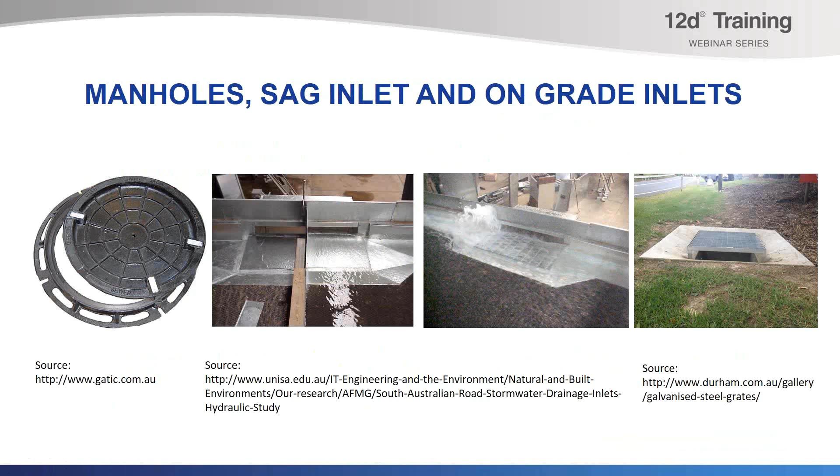Now let's take a quick look as we jump across into 12D, where when we do our modeling, we get to specify what the inlet configuration is. And this involves primarily the drainage network editor, but also the drainage.4D file. So let's jump across into 12D and see how this comes together.

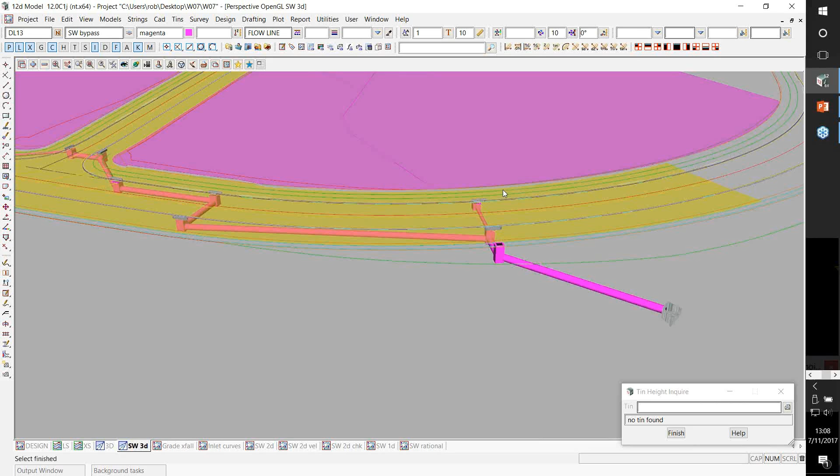So we're going to be looking at a very small network today because it's a training session. And you'll notice that we have a few inlets here. A couple of them are sags, a few of them are on grades, and the water eventually comes out the head wall down here at the end. So where I want to take you first of all was to our drainage network editor. Now, if you're unfamiliar with using the toolbars and you find your way to the 12D track, you'll find that the drainage network editor is the button underneath the track. So the first thing we'll do is we'll come across and we'll go and pick one of our inlets.

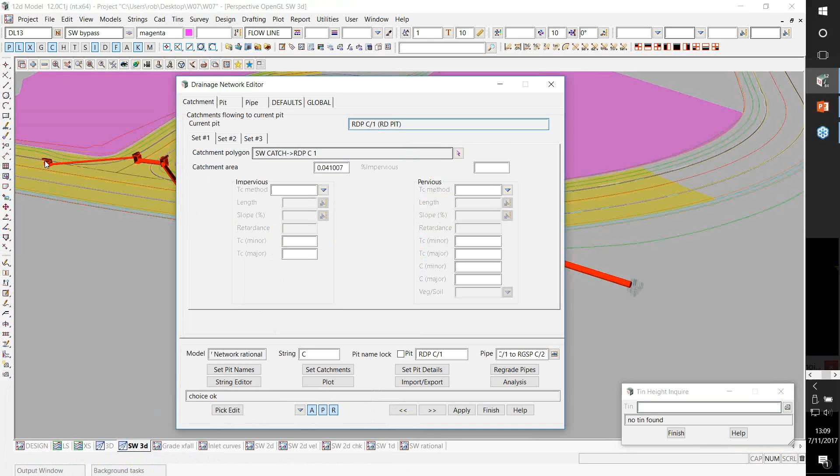Now, one of the first things I might mention is that when we decide whether a pit is an on-grade or a sag pit, sag inlet, it's a very important decision. Sag inlets tend to capture a lot more water than an on-grade, and we must make a decision about whether or not it's truly acting as a sag.

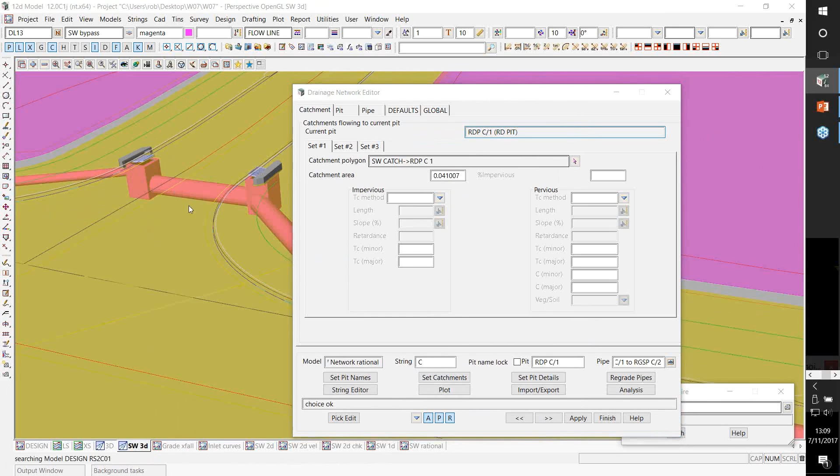So when you make that decision, look at the slope of the roadway that comes into your inlet. Make a decision if you think that the water will truly almost stop, pond at that location, and flow in. And if it meets that criteria, it's pretty safe to say it will act as a sag inlet. If the water is going to continue on by, then reconsider that and start thinking about an on-grade. So let's move back to this first one, which is definitely an on-grade inlet. So we'll go pick that one.

And let's move across to the pit tab. And on the pit tab, down here under inlet configuration, we get to select whether it's an on-grade, sag, or manhole. And in this case, you'll notice we are locked out. Now that's because the drainage network editor works very closely together with the drainage.4D file.

And the way it's set up right now is that if you were to select a sag road pit, it would come back with a bit of warning telling you that the inlet type is going to change. And if I say go ahead and update it, you'll notice that the inlet configuration has switched over to a sag pit. So the pit type has been uniquely associated with a certain inlet configuration. Now it doesn't have to be done that way, but it often is. So if I switch back again, I'm back to my on-grade pit.

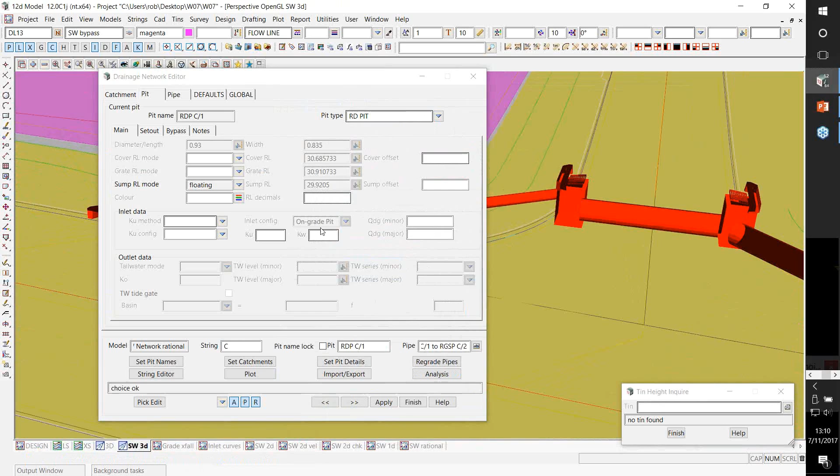So you'll notice how they truly are linked together. Now let's take a moment and see how that linkage works. To do that, we'll move up to our design, come down to our drainage sewer, and move down to our drainage 4D editor. Now this editor is new to version 12, so if you're in one of our older versions, it'd be one of the many good reasons to upgrade.

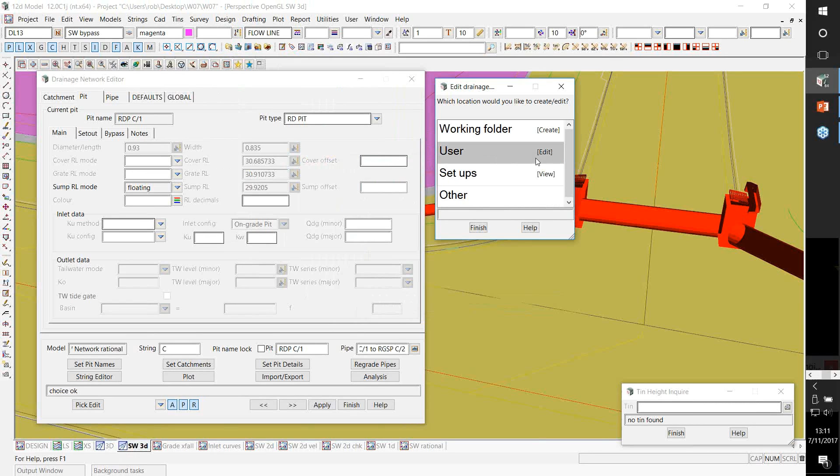If we come across right now, I've taken a copy of my drainage.4d file and it's sitting in my user folder. And it's not write protected, so therefore I can, in edit mode, and selecting it, start editing that file. So let's move down and take a closer look at this road pit.

So if I go select the road pit on the tree, and I scroll down just a little bit on my properties, you'll see that in here, the inlet type has been selected to be only on grade. It's this selection here that forces this inlet configuration to be locked to on grade. If I was to release this, then the user would be free to put in their own inlet configuration type there. I also mentioned before that when I switched over to the SAG inlet, that switched over.

So let's go take a look at that one. There's the SAG road pit that I selected earlier, that type. And if we were to move down, we would find that that one also would be set to be a SAG. And of course, the other option is we could have that locked into being a manhole.

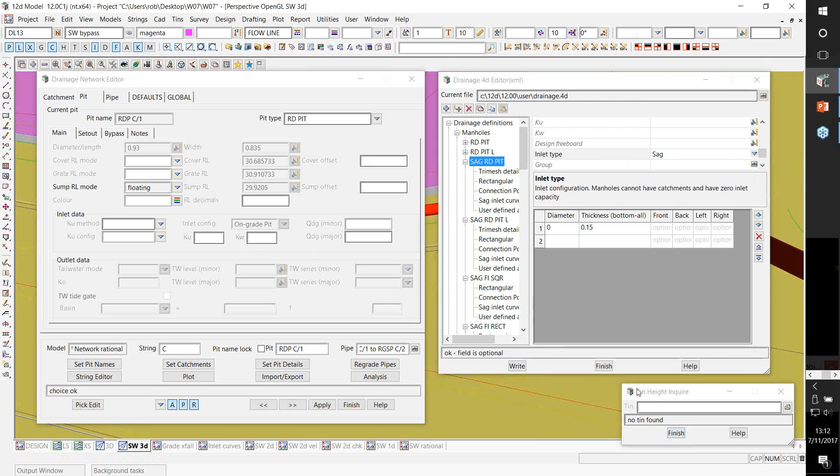So hopefully now I've made it apparent how the drainage.4d file can work together with the drainage network editor to make the whole use and modeling a little more accurate and easier to use, or consistent anyway. So that's the relationship between the drainage network editor and the drainage.4d file.

Now let's start talking about inlet capacity calculations. The heart of the calculations are inlet capacity curves. And there's two primary sources, I would say, for these. There may be more. And the first is an excellent manual. It's put out by the Federal Highway Administration in the United States, and it's referred to as the HEC 22 manual. And inside this manual, you will find many descriptions of inlet capacities.

It's chapter 4.4 that discusses inlet capacity, and you'll find a great number of equations for determining inlet capacities both for side inlets and for grated inlets. Keep in mind they are theoretical calculations, but it is definitely a start. There's many programs and spreadsheets that I've seen over the years that will implement these calculations.

When you do go through the calculations, the general steps that you'll go through is starting off with a road crossfall. And inside 12D, we work with our on-grade inlet capacity curves in groups of constant crossfall. And you'll see these sets a little bit more in a few minutes. The next thing you would do is vary in your calculations, or in the hydraulic model study we'll talk about in a moment, your approach flows and estimate the captured flow depending upon the properties of your inlet and your slope and crossfall of the road.

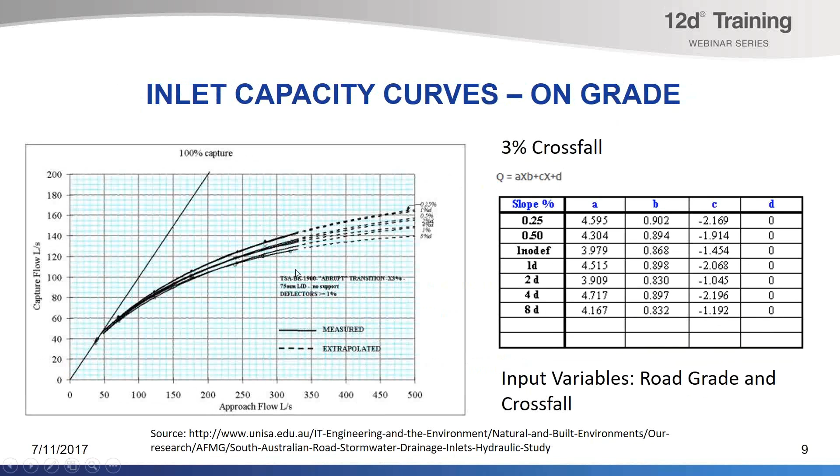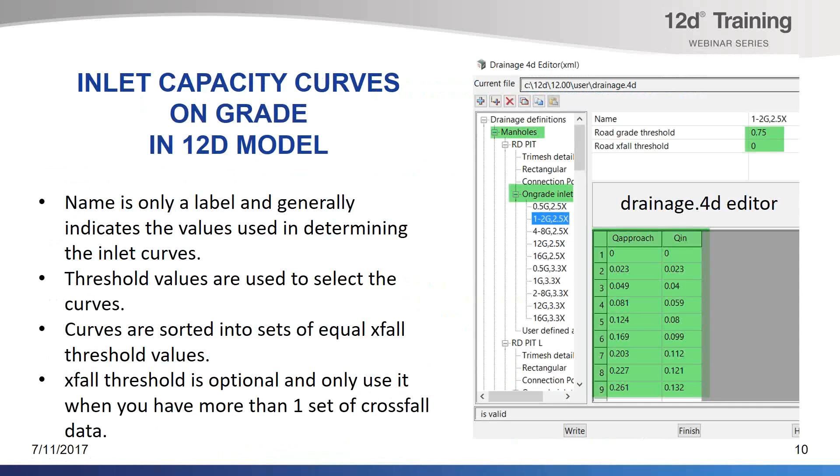When you get these curves, often they're given in curves like this, that you'll digitize. The other way you often will get the data is in the form of a polynomial equation. And inside 12D you can also enter these coefficients instead of digitizing these curves. So now I'd like to take this moment to say, well, how exactly do we get these curves into 12D model? So let's jump back to 12D once again. And I'm going to bring up the drainage.4d file editor one more time.

And let's investigate farther down into what these on-grade inlet curves look like. So you'll notice here for this road pit that we have, we've got a set of 5 curves, all with the same road crossfall, 2.5%. And so that constitutes one set of crossfall measurements. And down below, we've got another set at 3.3% crossfall.

And then within the crossfall sets, we've gone and varied the road grade. So let's just take a moment to take a look at this first road grade. Now down below here, this part will look fairly familiar. This is the digitized points off those curves we were just looking at. Generally, your curves will start at 0, 0, and the next point will be your 100% capture. So it will be the end of the 100% capture. And then you start out with your approach flow, and you'll notice that we're no longer capturing 100% of the flow.

So that's the data. Now let's go back and take a look at the name that we associate with this curve. The name that we assign it is generally an indication of how the tests or calculations were done. So in this case, it was felt that the calculations or the tests done will be valid for a 1% or 1 to 2% road grade and a 2.5% crossfall. There's two other numbers down below here now that probably need a little bit more explanation. Let's start with the crossfall.

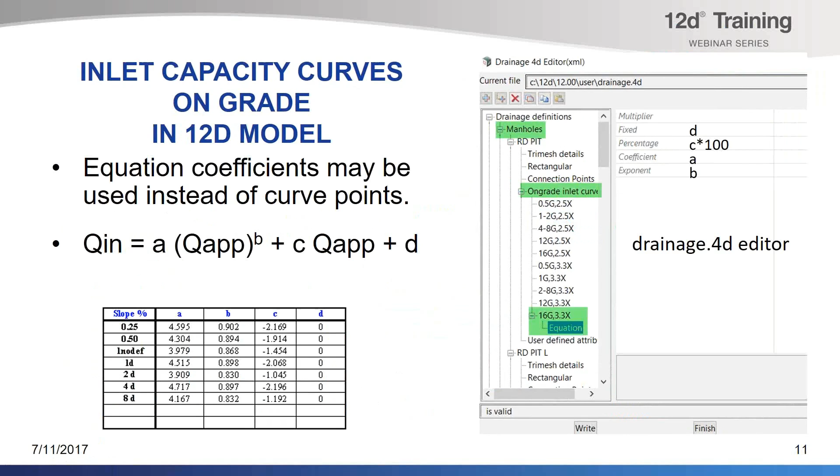I also mentioned that you can add an equation instead of digitizing the points. So now I'd just like to pop back to the drainage.4D editor to show you how that option works. So you don't want to enter both options, but if I did want to add an inlet capacity curve, I'd go to this child selection tool and add the inlet capacity equation. And inside the inlet capacity equation, I could enter in the 4 polynomials as I showed in that earlier screen. The multiplier simply takes the total inlet capacity and multiplies it by that factor. So generally your multiplier will be 1.

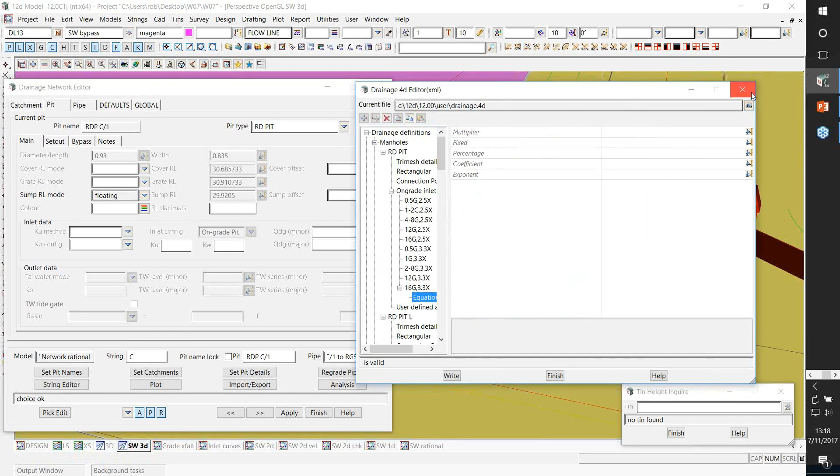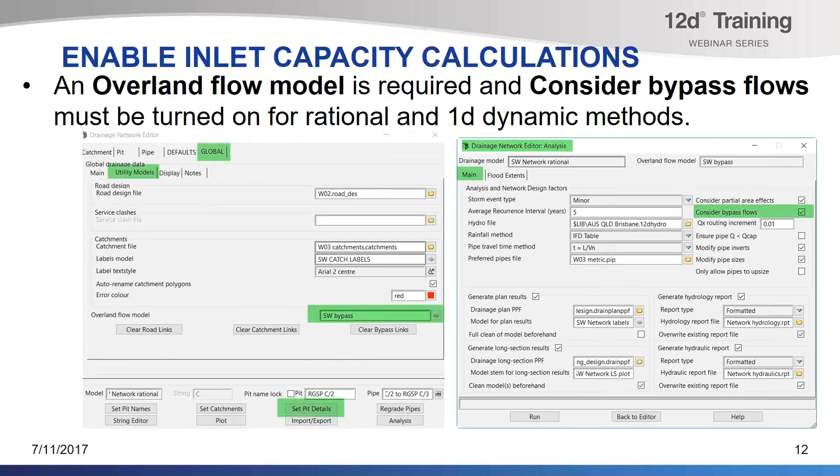So now that we've talked about the background, at least for the on-grade pits, let's take a look at the steps that are required to make inlet capacities enabled inside 12D model. So going back to 12D model, let's head across to our global tab. And on the global tab, we have our utility model tab where we link up the 12D drainage network to the other models inside 12D. And this is the model here that's going to make it all work.

Now this training webinar is not about bypass flow strings, which indeed would take up another webinar and it'd be a very interesting one as well. I look forward to that.

But right now we'll say that we just need those bypass flow string models specified in order to get our bypass running. And what these bypass flow strings do is they're just a string going from one inlet to the next inlet to say this is where the water goes when it will not enter.

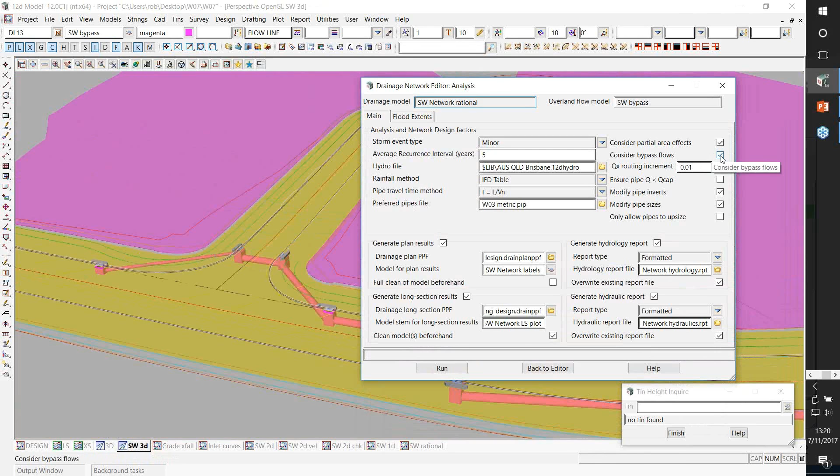So once we've got that model in there, the next thing that happens is when we go to do an analysis, we need to make sure we have the consider bypass flows selected. Now that's crucial when we do our rational method 1D surface flows and when we do our dynamic 1D. That tick box is not required when we do the 2D analysis. So those are the 2 bits to remember: if you want to do bypass flows, make sure that's turned on and make sure that you've got your bypass flow models for the 1D rational and dynamic.

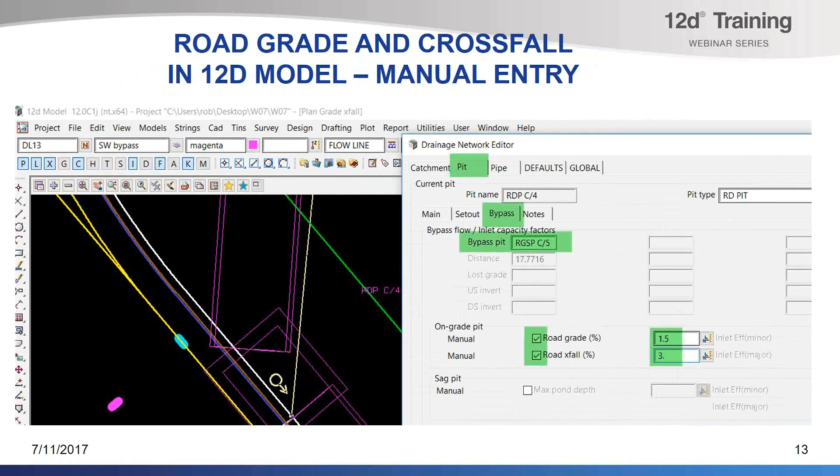Well, after talking about those pieces and ready to go, let's review this. I've talked a great deal about the road grade and road crossfall, but let's see how we get that data into our 12D model. So once again, I've gone and selected that first inlet up here. Let's head back to the pit tab. And if we move back down to our bypass, you'll notice that there is a road grade and road crossfall.

Now, if I was to turn on the manual tick boxes, I'd be welcome to put in my own values if I wished. The concept of the Drainage Network Editor when it was designed was that you can go 100% manual if you wish, type in the values, or the way that most people will use it is an automated procedure where 12D will calculate the values for you. So let's try going the automatic method and start taking a look at this. Now that I've shown you the manual, we're going to switch over to that automatic.

In order to get the 12D model to automatically calculate the road grade and road crossfall from your design tin model, we're going to need to use our road strings. Now these road strings are used for several different aspects of our hydraulics and our physical layout of the model. Essentially, they're not required, but this is one of the options inside 12D that just keeps giving. It's like every time you look at another part of 12D drainage, you find out there's one more thing you can do with our road design strings.

So in this case, what we're going to do is focus on looking at these last three columns and how they impact the measurement of the road grade and road crossfall. So you'll notice that they're completely blank right now, which means we're going to be using the default values. Now there's a few extra rules in the defaults, but essentially we will move up one manhole diameter in the uphill direction in order to measure the road grade. Now of course we want the road grade of the approach flows, and that's why we've gone uphill, according to the design tin model. So officially these set-out strings only need to be an XY string at this moment.

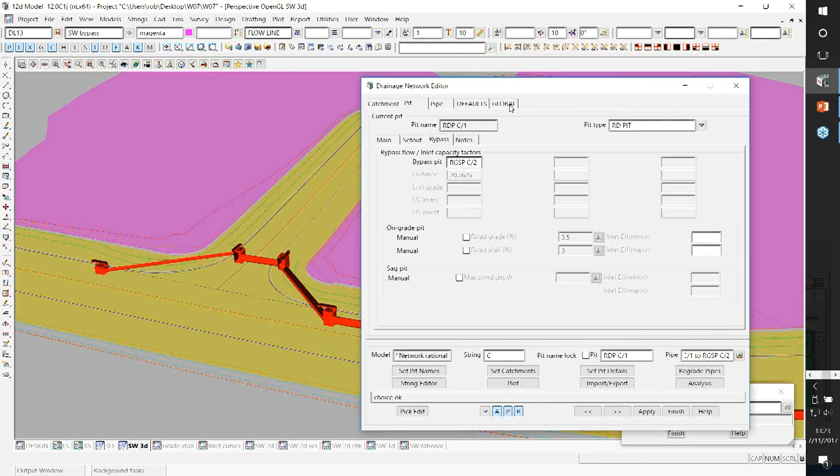So let's go take a look live for a moment at where that would happen. So there's our global tab, there's our utility models. If we go and open up that road design file, you'll see that we have the road grades, the road crossfall, the slope measurements. We've got our set-out strings, which we will use to determine the road grade, and we've got our centerline strings so we know which way to go to measure the road crossfall.

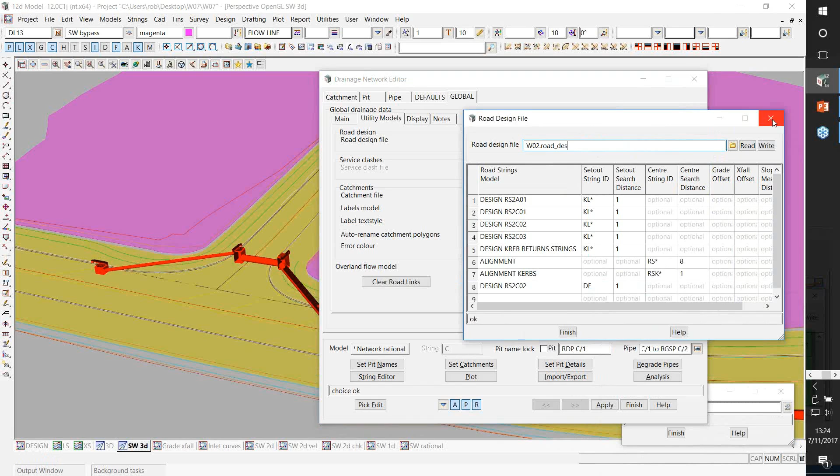Now on a small technicality, you only really need the road crossfall if you have more than one set of crossfalls. If you have a single set, well, there's no need for the extra one because your choice is limited to one set. So that's just a little bit of the background information about how you can automatically calculate the road grade and the road crossfall for an on-grade inlet. Now let's take a look at these inlet capacity curves that you would have entered and a way to display them to yourself and probably someone who's going to review your design.

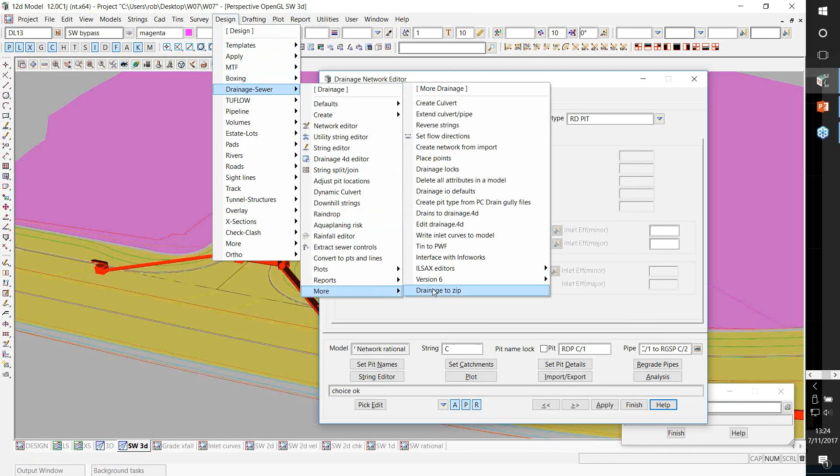Back inside 12D, we have an option under Design Drainage Sewer. We have to go all the way down to More, and it's called Write Inlet Curves to Model. Now when I do this, I tend to put a Z at the beginning just to make sure these models appear at the bottom of my model list.

We multiply the numbers by 1,000. I didn't mention it before, but all of the data that we were entering into the drainage.4D file was in cubic meters per second because we're operating in the metric system. So multiplying them by 1,000 in this case would convert the cubic meters per second into liters per second and convert the meter depths into millimeter depths.

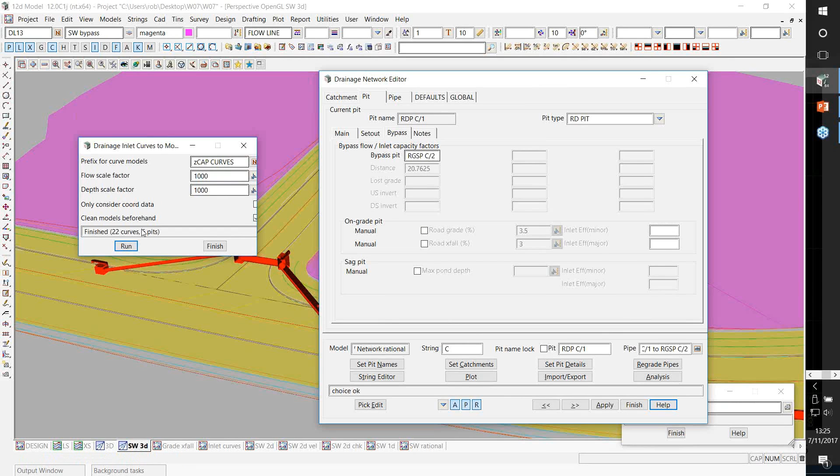So when we go run that, it's a very quick routine to run, it goes and creates a new set of curves. Now often I'll set up a view just ready for my inlet curves, and on this view I've got my... don't need those axes. I've got my axes for my approach flow. Let me move that across. And my captured flow. And I've got my inlet capacity curves for my road pit.

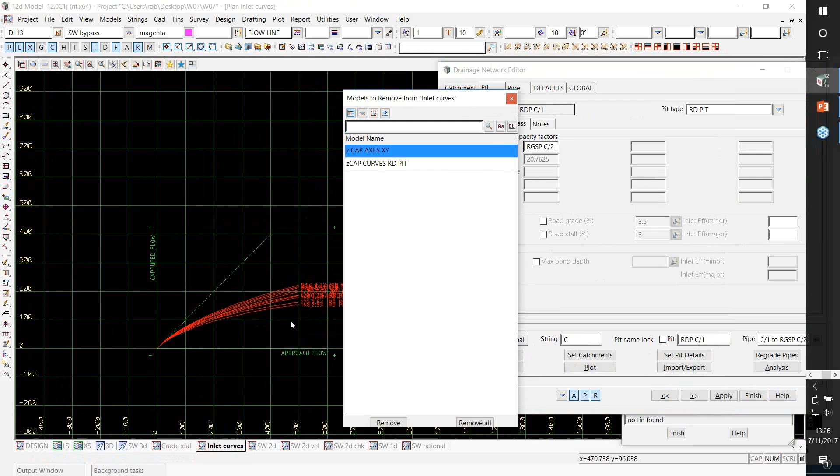Now, a fair question would be, where did those axes labels come from? If you're interested in putting those on your drawing for when you show someone, of course they're not required, but those are available in a 12DA file inside our library, and I'll show you that name shortly.

So what we're looking at here is the data that we looked at in the drainage.4D file. If you remember, that was the end of the 100% capture. So if I was to click on that, you'll notice that that was, let me get a point snap, that was the 1616 from the lowest curve, okay? So that's our end, and then we have, of course, all the extra points from our curves. So, excellent idea to print these curves so you know exactly what you're using inside your design.

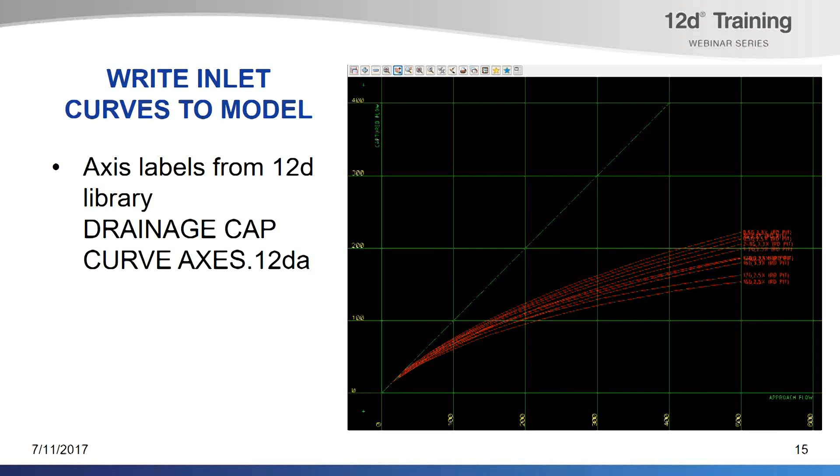Let's leave the on-grade curves behind, and let's move over to talk about the inlet capacity curves for a sag. Now, sag pits, once again, as I mentioned, is where the water generally will stop at a location, of course not come to complete stop, but not bypass, and then start flowing into the inlet. So it will pond up. So it's the depth above the grate that becomes important. So now we'll take a look how we can enter this depth versus Q in.

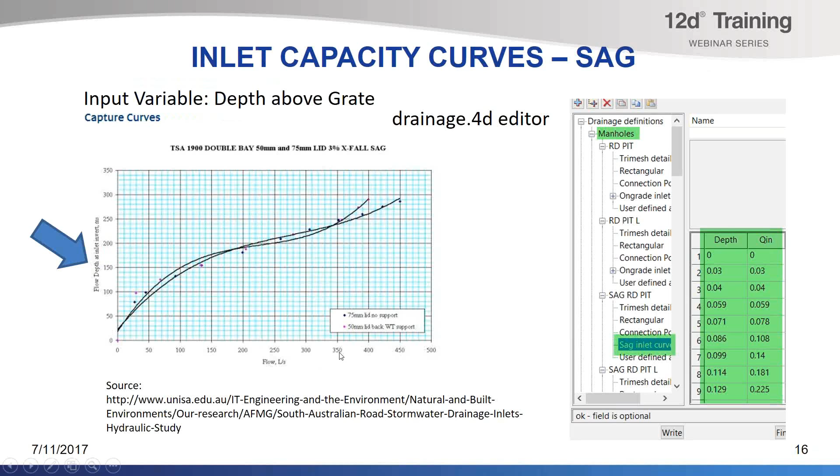Now, if you do get an inlet capacity curve from many sources, there's a tradition inside the stormwater industry to put the flow depth on the vertical axis. And this comes about because the depth, of course, is a vertical measurement, and hence the vertical axis seemed to be a good idea. 12D has gone more with the scientific consistent approach, where we put the flow, inlet flow, on the vertical axis again, exactly the same as the on-grade pits, and we put the depth on the horizontal axis. So let's just go back now, jump into 12D and see where all that happens.

So the very first thing I'll do is I'll go back and I might turn off those curves, and I'm going to add on some sag curves. So what I'm going to do is put on my axis labels, and then I'm going to come down here and add on my cap curve sag for my road pit. And let's add those on.

So once again, this becomes the x-axis. You notice it's depth this time, so it's been a little bit flipped. And one thing I'd like to bring to your attention is that if we looked at about 150 millimeters of depth, this is a typical 2-meter side entry pit, we're capturing almost 300 liters per second. So once again, keep in mind that sag pits tend to capture a lot of water.

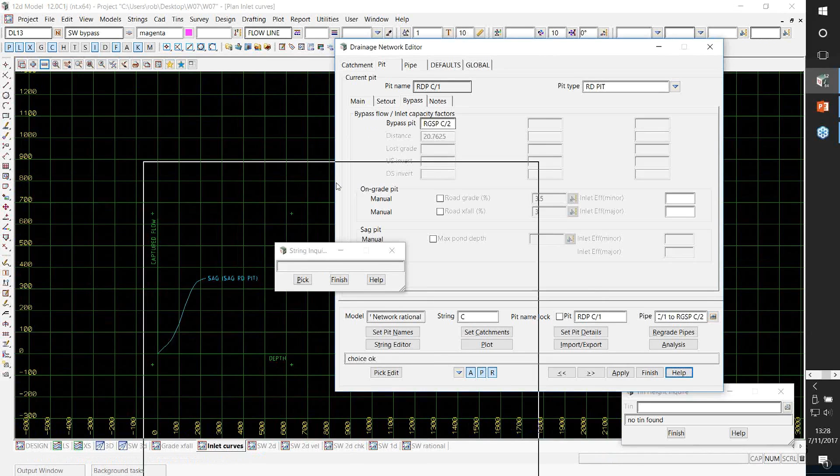Now that's what the curve looked like. I haven't showed you what that curve looked like inside the drainage.4D file, so if I just pop back there one more time, go back to that user, let's just pop down to the sag inlet and go take a look at the sag inlet curve. And once again, there's your depth versus your Q in. The depth in millimeters and your Q in cubic meters per second. One thing you might have noticed with a sag curve is you have only one. On grade curves, of course, you have many. On a sag curve, there's a single curve for that.

Now, in this configuration, these inlets are only used either in an on-grade or a sag, and not both. However, that's not always the case. Many times a user will have a stormwater inlet that can be used equally well in a sag location and in an on-grade location. In that case, we would ask you to put both sets of curves inside one manhole type, and then you would definitely not specify this value here, because you'd want to leave that open to the user to decide at modeling time whether it was going to be in a sag location or an on-grade location.

Now let's go back, and just as we did for the on-grade inlets, I'd like to go back and talk about how we get the depth measurements for the different hydraulic methods inside 12D. So let's start with the rational method.

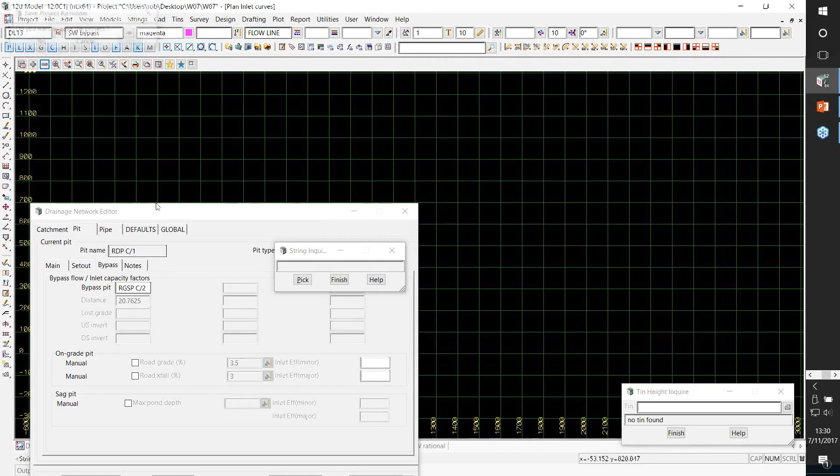So moving across here to a plan view, and let's just get that out of the way. What 12D does is we need to know what the maximum ponding depth is before the water starts to flow out of this catchment and over into the neighboring area. If you've gone and drawn your catchment strings inside 12D, and it's a sag pit, you would expect this catchment line to be drawn around the crest of the catchment. And so all the water flows from this crest line down to the inlet.

Now, if we were going to go and drape that catchment string onto your design tin, and just for those who aren't familiar with that, the design tin is the one specified in Global Main. Okay, so if we drape these onto the design tin, and 12D does that automatically, it will find the low point. Now the low point on the crest is when the water will overtop. So what 12D needs to do is to find out the elevation of that low point, find out the elevation of the grate, and the difference will become the ponding depth.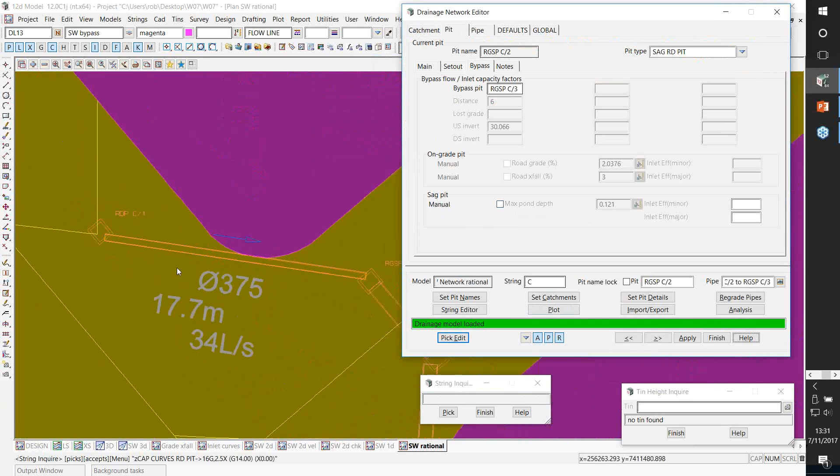Now the place we're going to find that ponding depth, once again, is on the pit bypass. And if I was to go select that sag inlet, you'll see that down here, we still have the other ones, but they're grayed out. But because it's a sag pit, we have our maximum ponding depth. So once again, that was determined by finding the low point on the catchment string and subtracting the grate level.

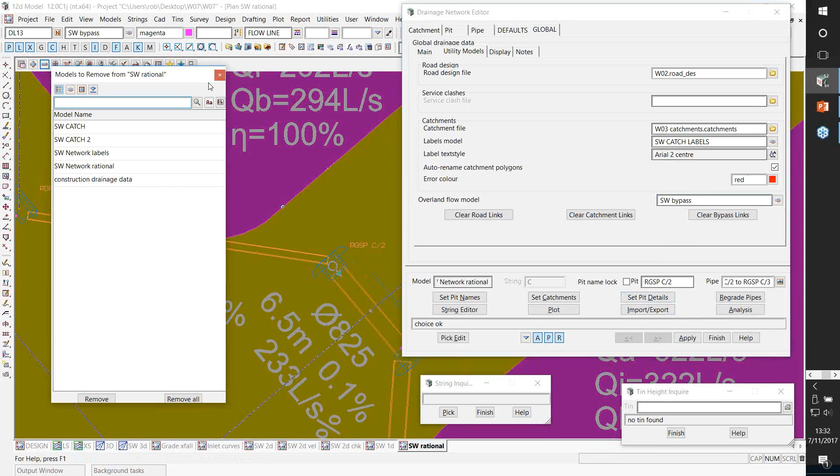Now, the moment we specify our global utility models bypass and do a set pit details, 12D goes and creates a new model for us. And that new model is called construction drainage data. And it's an excellent one for helping us confirm how our inlet capacity calcs are being done. So I don't know if you can quite see it, and you probably can't. It's just a very small cross here. That is where the low point on the curve is, on the catchment strings.

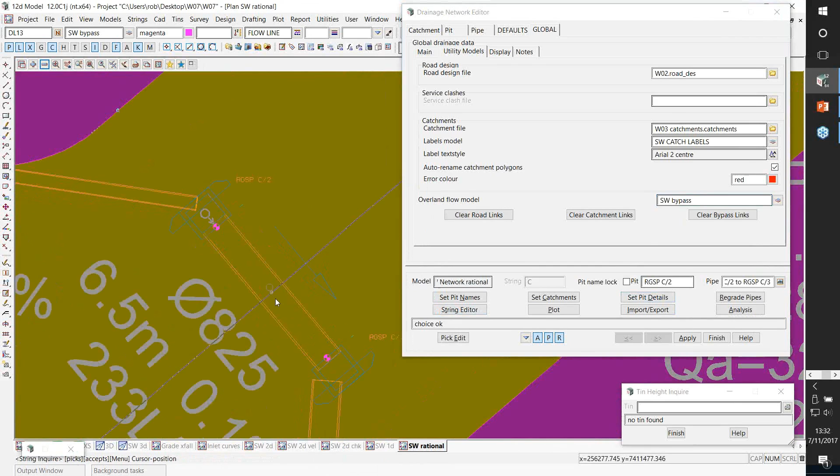So if I was to go select that, there's my catchment, there. That's my network labels. And you can see I'm clicking here, and I'm not quite finding it. Let's just try that one more time. Catchment. All right, so when it's a little bit tough to find them, the best way to get an accurate location of where these inlets are is if we go to our models, we can go down to our string information table and bring up the construction drainage data model.

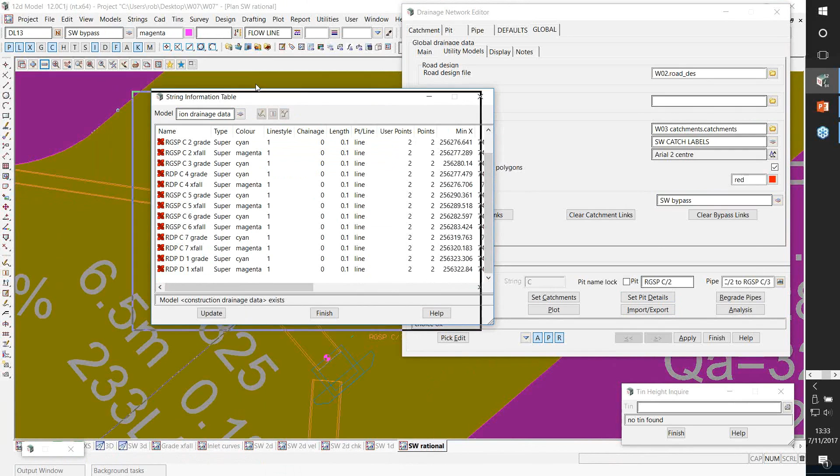Now, if I sort them by the user points, I think I'm onto my trouble right now. I think this might just be a really great time to go do a set pit details for this. And let's go update that. All right, so these are the spill crests that I'm looking for. Now this was inlet C2, so there C2 is there. And when I click on it, you'll notice that there's a great big cross there that helps me accurately find that location.

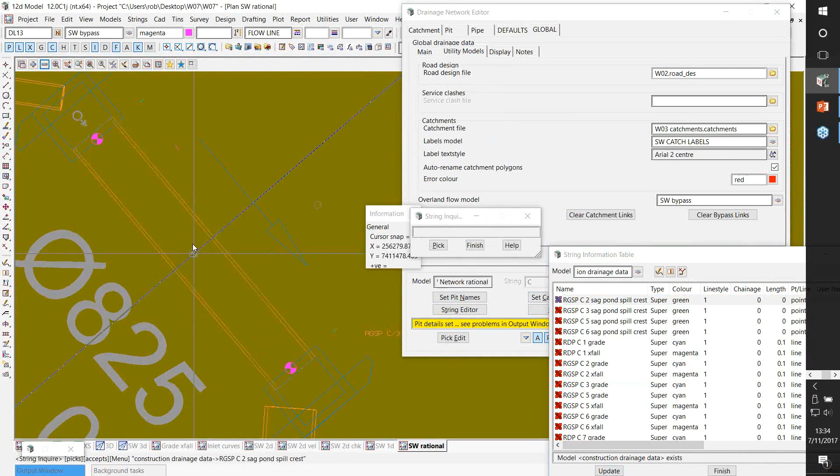Now if I was to come back and ask for some more detail, I could hit my F2 key, which is my string inquire, and go and pick that location. And there's my construction drainage data point, and the Z value on that is 30.066. So that's the low point. That's the elevation when water will just start to overtop. Now the other thing, if I was to come back to my, I've got my minimum, and because there is only one point, the Z value specified there is also going to be the same Z value.

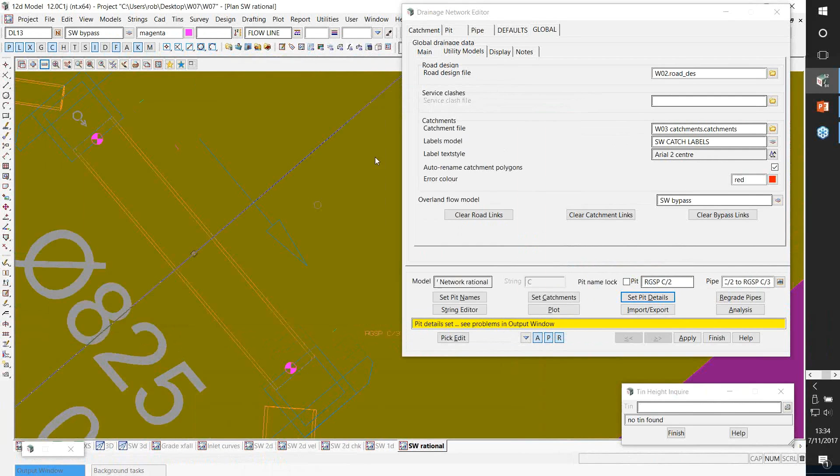Now if we head back to the pit and we take a look at this maximum ponding depth, there may be times when you may want to make that slightly deeper because you have an estimate of how deep the water is going to get when it overflows, or because your terrain model isn't quite finished. It would be a good time that you might want to go manual and override that.

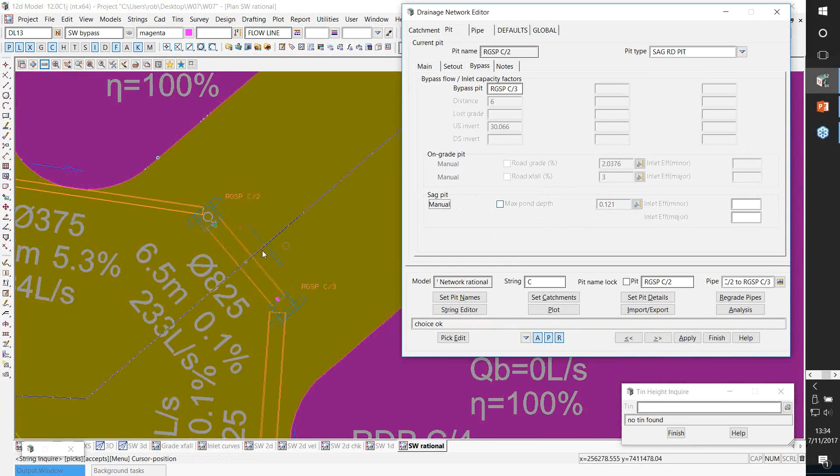One of the symptoms that your catchment strings are not quite in the right direction, or your terrain model isn't quite up to scratch just yet, is that you'll get a negative ponding depth. We'd give you a warning if this ever happened, but the trouble is, of course, that if the overflow point is lower than the grate, then no water is ever going to pond up, and you're never going to capture any water. So watch out for those negative ponding depths. It means there's a bit of a data entry error on your model. So hopefully that talks a great deal about how we measure that maximum ponding depth for the rational method.

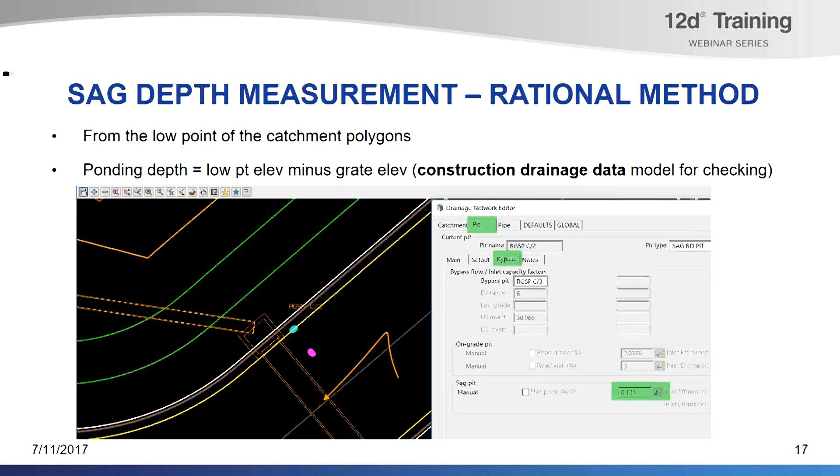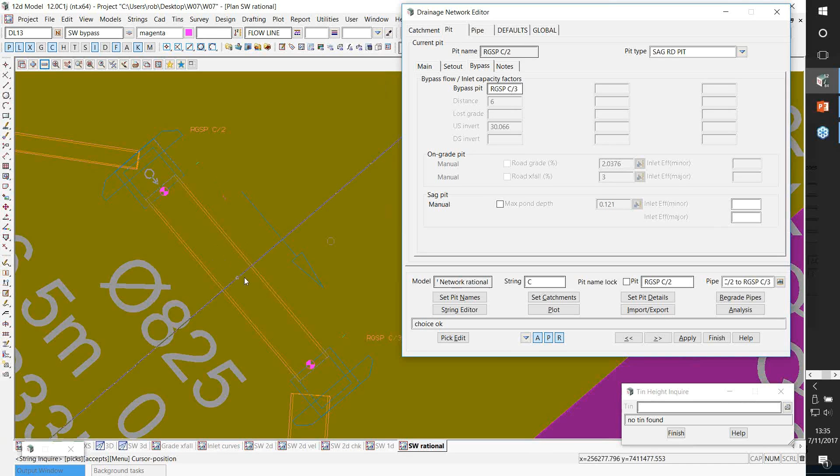Moving on to the 1D dynamic. The reason we had to enter a ponding depth for the rational method is it deals only in peak discharges. It has no concept for volumes or how much water it would take to fill up this area in order to bypass. That's not true with our 1D dynamic. It works with volumes, and it's an important part of the analysis.

So I'm going to switch over to another model here that I have, which is my setup for my 1D dynamic. And let's go select one of those inlets. Same location. And what we do with the dynamic is, because with the dynamic we have dual hydraulic grade lines, we need to have a shape for what the overflow point is going to look like. And our plan here is to model this as an overflow weir.

So when you're working in the dynamic, what I would be doing is going across to my pit tab and going to my bypass shape and selecting a string that I've drawn, just a 2D string, that goes along the crest. And then what that does is 12D automatically drapes that onto your DTM and gets the shape of what it looks like when the water overtops that. Selecting a road weir tells 12D to model the overflow as a weir type calculation rather than a conduit.

Now, whenever 12D drainage works with a shape of a conduit, we're always using shapes, and the absolute elevation, or RL, will come from somewhere else. So when you do this, what we need to specify is what that low overflow point is. And the place that happens is on the bypass tab, and it's the same number you saw before with the rational method, 30.066.

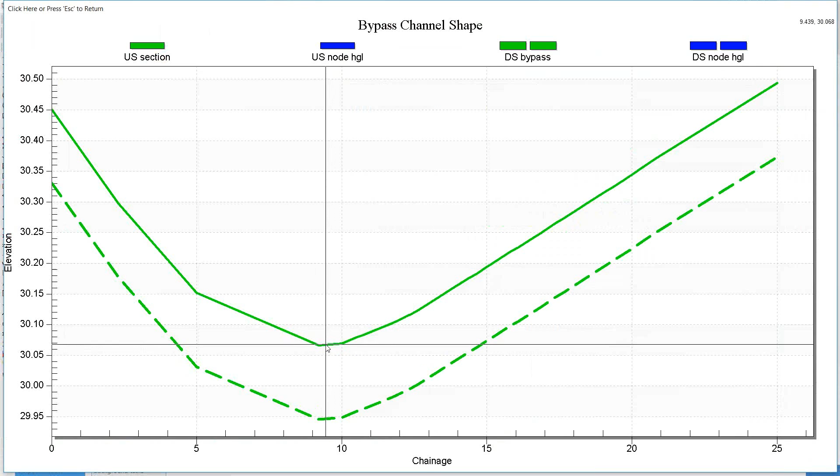So essentially what that does, if I do a right mouse click and maximize this, you'll see that the bottom elevation of our channel shape is sitting at 30.066, and that's when the water would start bypassing. So what's going to determine the bypass is when there's enough volume to fill up this area, and then it flows over. So you'll see it's done slightly different inside the 1D dynamic. And when you do the 1D dynamic, the pit maximum ponding depth is no longer relevant or used.

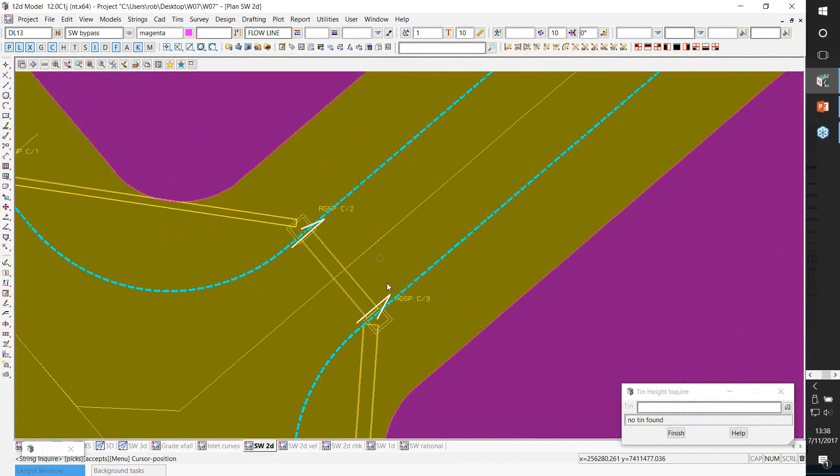Let's now just take a look at what happens in a 2D dynamic model. When it comes to the 2D dynamic model, we have to decide what sort of connection mode there is between the node and the 2D domain. So if I pop back once again, grab my drainage network editor, and pick one of my inlets, head to my pit tab, and you'll notice that the connection is determined. 12D will automatically do this via the grate.

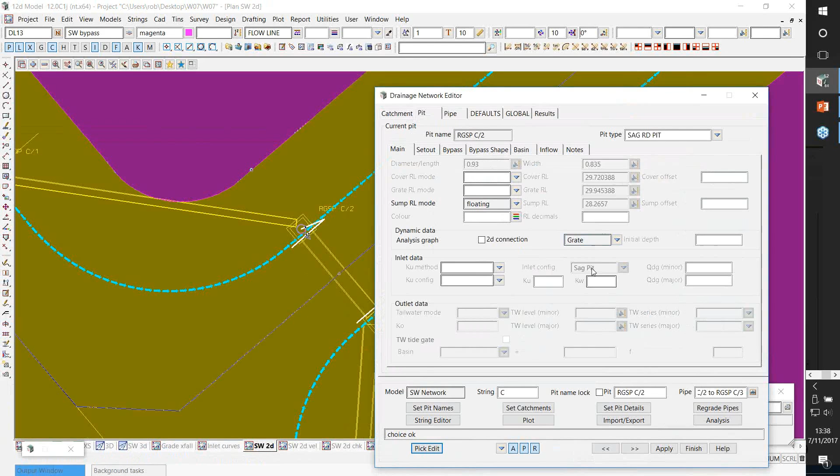So whenever the water is going to enter the stormwater inlet via the grate, we will do inlet capacity calculations. And because it's marked once again as a sag pit, we would do sag pit inlet calculations. One of the things that 12D will do automatically is it will connect all of the outlets to the sump. Because of course the water is not going to bubble up and come out of it. Well, it might for a bubble up pit.

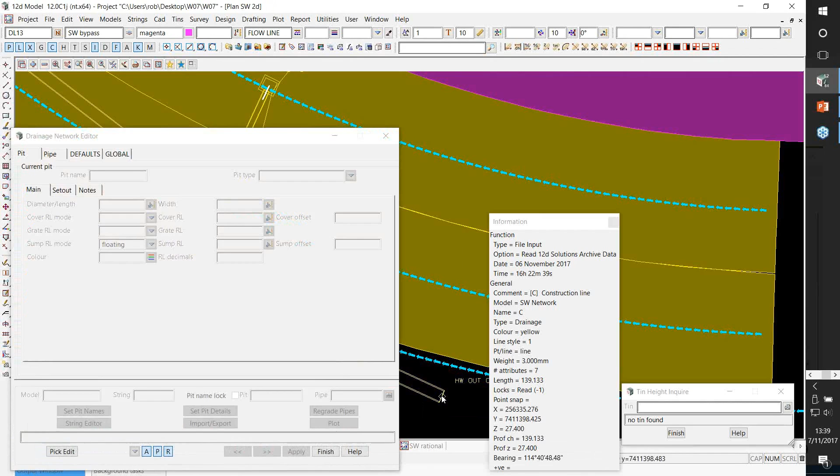But if I was to come down and pick this outlet here, network editor, go back and pick that outlet, and head to the pit tab, you'd see 12D would automatically have connected that to the sump. So the concept there is that the water is going to exit at the bottom of the stormwater inlet. So you can see the water would be coming out down here and entering directly into the 2D domain. So it's important that your 2D connection be set correctly.

Now, the other time you want it connected to the sump is when you're doing a culvert. So if you happen to have any of the culvert inlets set, it will change the Ku method. And if 12D sees the Ku method being any one of our culverts, then it will also switch this over to be a sump for you.

So to summarize that once again, if you have an outlet or a culvert, 12D will automatically hook it up to the sump. Everything else winds up being a grate, unless of course it's a manhole. And with a manhole, there is no connection. On the selection menu, you'll notice there are two different options, a not set versus a none.

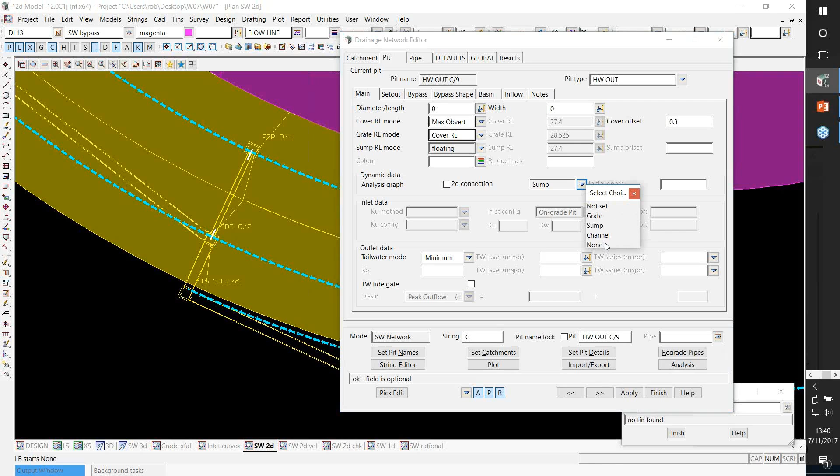Well, the difference here is that if we go to the not set, it means on the next run, 12D is more than welcome to go and change it to whatever it feels is appropriate. So not set instructs 12D to go and select one of these. If you set it to none, that's a way to tell 12D that you absolutely under no circumstances want that inlet connected to the 2D domain.

So you'll see that's the extra step when it comes to looking at inlet capacities and the connection between the 1D pipe system and the 2D above ground analysis. Now there's going to be one other step that comes into the connection, and that is to make sure that the cells are big enough to deliver the water to the inlets.

Now when I talked about a sag pit, we talked about the fact that they do capture a great deal of water. And in the analysis that we're about to run, we're using 1 meter grid cells. Now a 1 meter cell may not have enough water, probably won't, to supply a sag pit. And also the lintel is often 2 meters or longer. So we need to instruct 12D to connect more than one grid cell to the sag inlet. And we do this via 2D connection zone lines.

So the idea inside 12D is you draw a string cutting across the cells that you'd like to connect, and then finish off at the center of the inlet. The cells that this line crosses determine the connection. This last little bit, the last segment, is completely ignored in the selection of the cells.

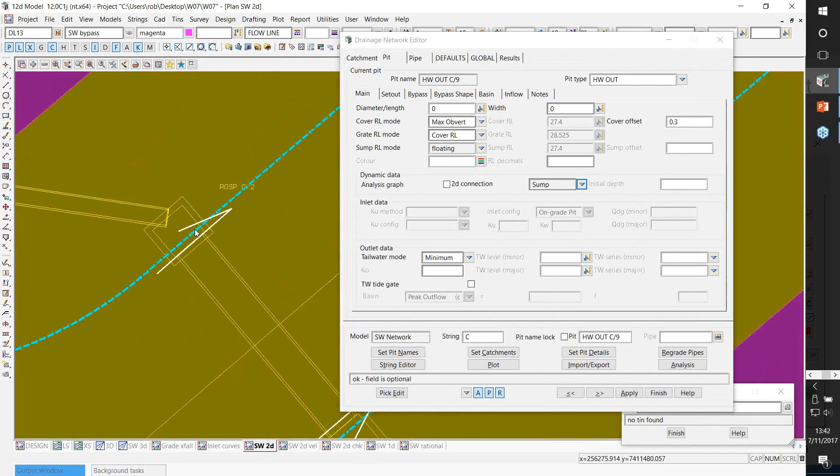So if we were to jump back into 12D for a moment just to see what one of those would look like live, okay, there's the line that's drawn there. Let me just go pick that one so we'll stay a little bit in that area. There we go. So if I go to my global tab and utility models, that's where I've specified the model containing those connection zones. And it's the set pit details button that tells it to do the connections.

So in short, when you're doing the 2D modeling and you feel that your inlets need to be connected to more than one cell, this is exactly what you need. You need a connection zones model and those connection zone strings.

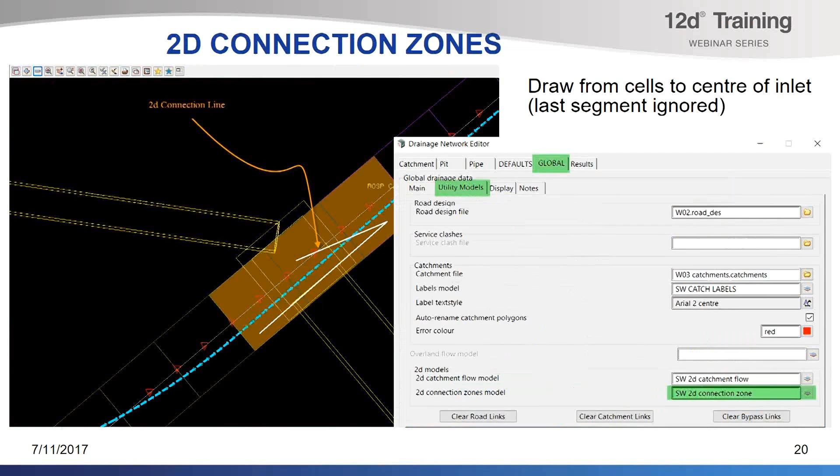Now, just before I take you back to the PowerPoint, the actual inlet calculations, the depth of water on the surface, is something that TUFLOW has a good handle on. It reports back to 12D exactly what the depth is, and then 12D extracts that amount of water from the 2D domain and passes it into the pipe system. And of course, that exchange could go in either direction if we had excess flow coming up to the surface. So that's about the 2D connections and the connection zones.

One question that frequently comes up is, well, what about trench grates? What about these long grates whose inlet capacity is dependent upon their length? The inlet capacity for these is specified in cubic meters per second per meter of grate. So what I might recommend is to enter that inlet capacity as a fixed value into our drainage.4d file. And then you can use your inlet efficiency to specify the length of the grate.

So for example, if you were to put in a 2 meter long grate, it would take this number and multiply it by 2, and then it would change the inlet capacity. A good way to look at trench grates. Currently there is a maximum of 10 allowed for inlet efficiencies. So currently, without doing some other fudging, you'd have to keep your grate lengths under 10 meters.

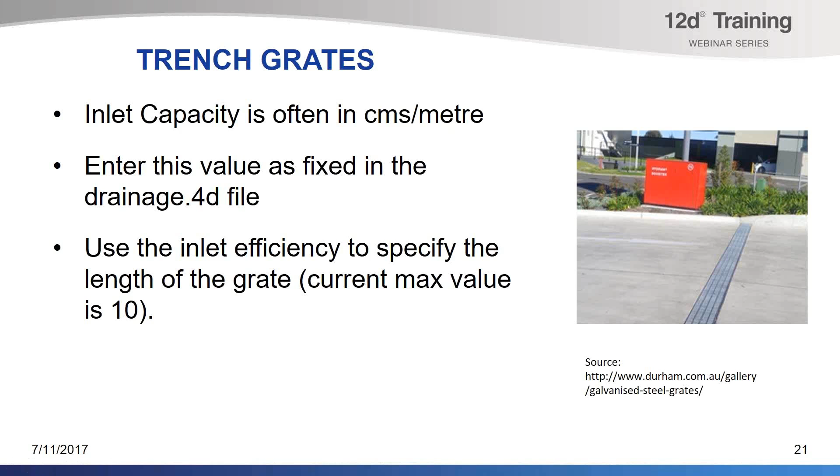So we've talked a great deal about the setting up of the inlet capacities. And in case you're wondering, yes, we are going to do live runs at the end here. But before I move there, I want to talk a little bit about inlet efficiency and blockage. Now, if we remember those original pictures where the water was freely flowing into the grates in that hydraulics lab, just how a stormwater inlet blocks is wide open.

There are so many different ways that an inlet could block, at the upstream, the downstream, it could be the side. So what happens when we start looking at blockage? The question really is how will the stormwater network perform under reduced inlet capacities? Now that's a very open-ended statement, reduced inlet capacities.

And there's two primary ways I've seen people model or want to model the reduced inlet capacity. What I have labeled here is option A, and this is one that's often talked about in the early versions of AR&R, where you will go and multiply the captured flow by an inlet efficiency, for example, 0.8. So what happens in this case is that all of this axis gets multiplied by 0.8 and it essentially flattens out the curve.

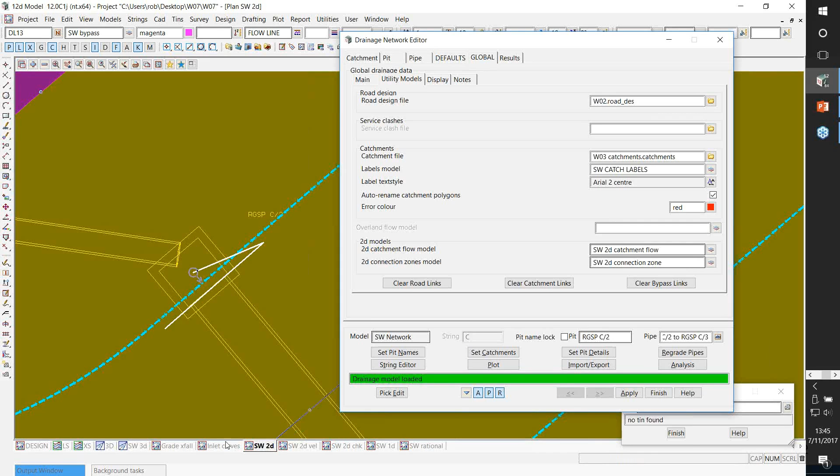Now, if I was to jump back into 12D just for a moment and take a look at those inlet curves, I might just jump back to my on-grade ones. Okay. What that's going to do is move down this axis. So before, when I was capturing 16 liters per second, if I had an inlet efficiency of 0.8, it would bring that down to 80% of that. But the trouble is it's not just this point. If I had 1 liter per second approaching, I would only capture 0.8 of a liter per second. And that really doesn't work very well if you're trying to model 100% inlet capacity.

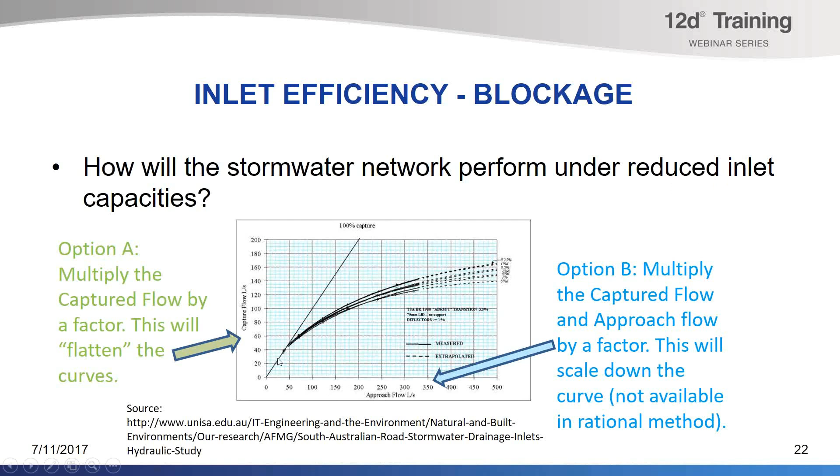So another good idea came out for modeling reduced inlet capacities, because keep in mind that's what we're trying to do, and that was to multiply both axes by a factor. Now this has a much more interesting effect. What happens is the 100% inlet capacity point moves directly down the line. So we go back into 12D, okay, that's 16, would move straight down here until we get to the 80% mark. So the 100% inlet capacity would end at a lower value, but we would still get 100% inlet capacity.

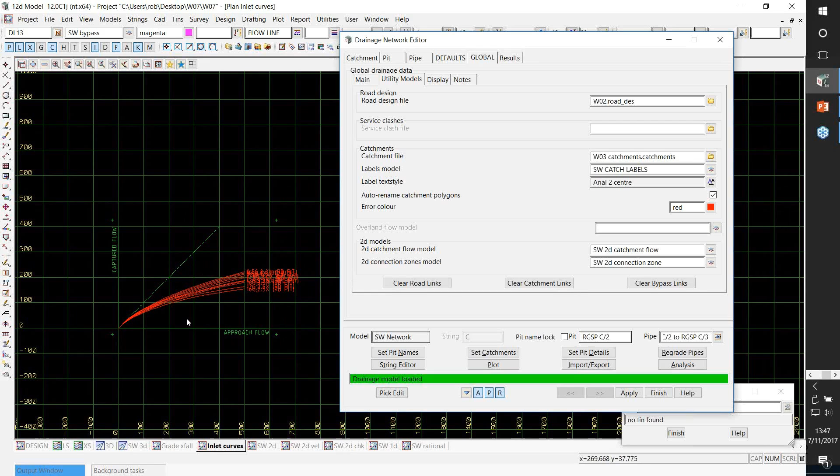So the effect of this is to take these entire inlet capacity curves and scale them down. So we've adopted the name scaled inlet capacities. If I went to my global tab and to main, 12D has an option of scaled blockages, and you can use that for the 1D or the 2D analysis. It's currently not available for the rational method. So that's the concept: it scales down the entire curves by multiplying both axes by that inlet efficiency. And that's just a screen of how we do that.

Now, the next part of inlet efficiency is how we put these values in when we're ready to look at a major storm. Inside 12D, we work with the concept of defaults, where you can set implicitly what the inlet capacities are. So defaults, pits, and if we take a look at the major storm, we've set the inlet efficiencies to 0.8 for our on-grade pits, and 0.5 for our sag pits. Now, anything that you ever find on the defaults tab, you're always welcome to override and explicitly set.

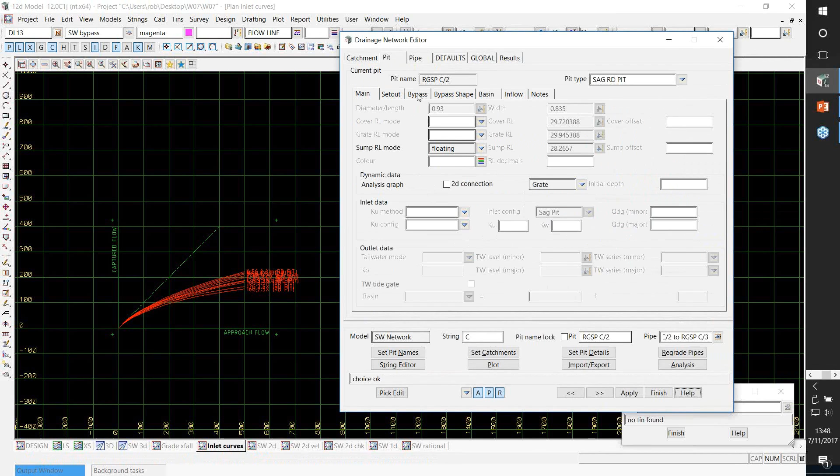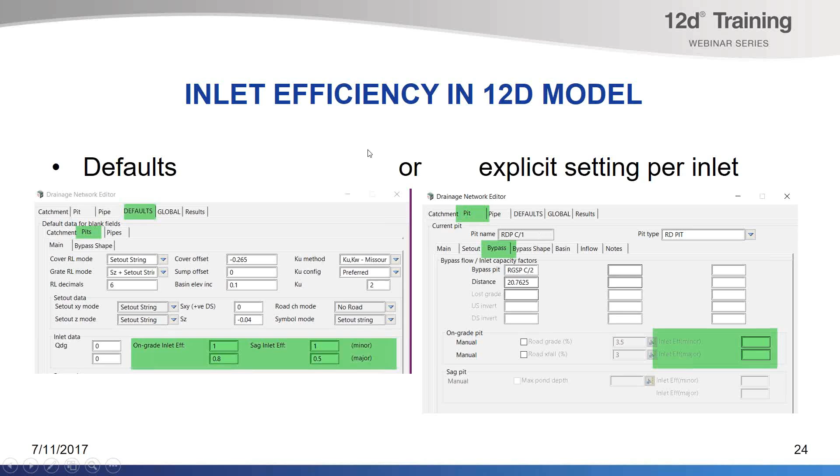So if I went back to my pit tab and then to the bypass, I'd be able to specify my inlet efficiencies there. And of course, blank means use the default, and if you happen to have forgotten what the default is, it'll be presented to you as the tooltip. So that's what we're going to look at doing for the inlet efficiencies.

So, a great deal of information has been presented here, and we've talked about the on-grade pits, sag pits and manholes, and we've talked about them in all three modeling approaches: the unsteady, the 2D model, and the rational method. So now what I'd like to do is run these and take a look at the results. So I'm going to jump back into 12D, and let's start with the 2D modeling.

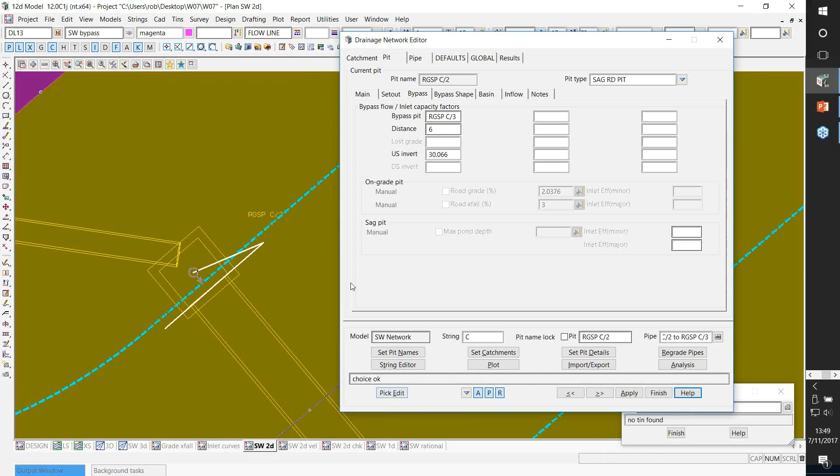With our 2D modeling, the first place most people are going to get access to this is by using the road flow. So I come across here and grab our road flow. You'll notice that this has been pre-filled out, and that's because I have set the defaults, to save myself a little bit of typing during the presentation. Now, it's not a road flow webinar. As a matter of fact, we have a very good road flow webinar on our YouTube site.

But the part I want to draw your attention to here is that on the optional tab, we've specified our drainage network. And it is that drainage network that's going to be supplying the flows to that model, which is why we have our rainfall on grid set to 0. So when we hit that run button and say yes, it's going to erase the files, start from scratch, and analyze every one of those inlets within the 2D domain and mark them as a grade inlet connection, a sump inlet connection or none, as we discussed earlier.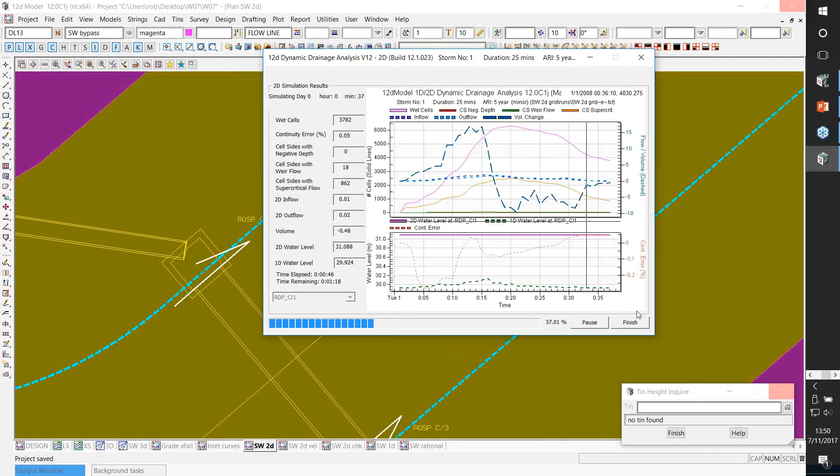I think we've pretty well got it. You can see that the wet cells are dropping off, so the system is definitely in the recession limb. We can just finish that. And now that that's finished, we'd like to go read those results in. And when we read results, we always need to pick the log file, and we can go read those results.

Now, if we jump across, I've got a view already set up with our tins on it. And of course, one of the beauties of 2D modeling is you can see here we've got our approach flow to this pit. As soon as the water starts to go around the corner, you'll notice that it doesn't follow directly around the corner. We get to see the effect of the velocity and momentum of the flow.

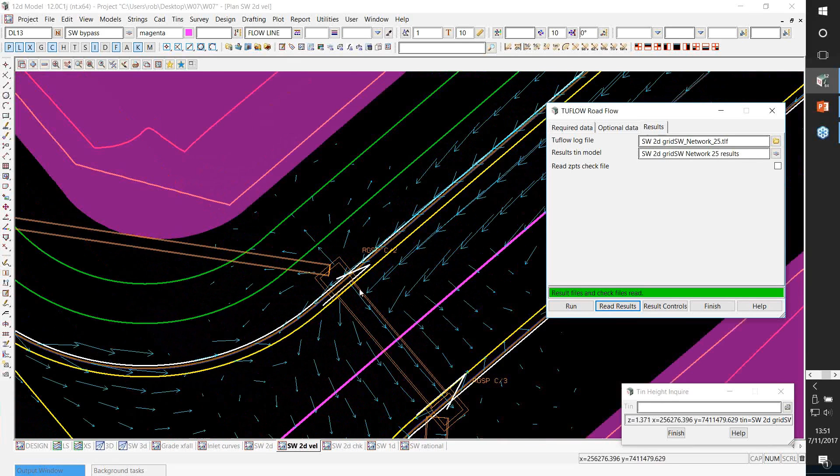And of course, we've got a very large catchment coming down this direction, which is why we get that extra momentum carrying the flow over in this direction, and then off it goes and it continues down the roadway. So the 2D gives us a very good idea of exactly where the water is going to go. But now let's jump back and see how we can look at those results.

Once again, we'll jump to the Drainage Network Editor, and I'll start out by taking a look at this on-grade pit we were looking at earlier. So if we head across to our Results tab, one of the graphs that's available with our 2D, or our 1D as well, is our approach flow, elevation, and captured flow. So I'll hit the Enter key on that, and I'll maximize this so that everyone can see it quite clearly.

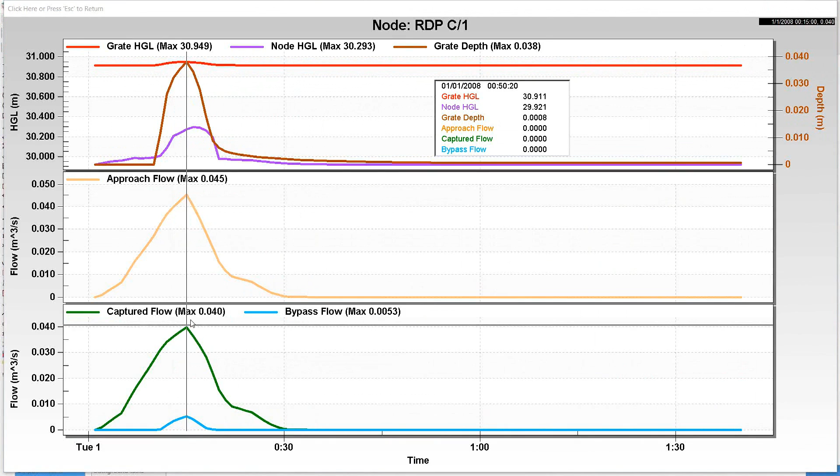Now this gives you a good snapshot of what's happening. We've got 45 liters per second approaching from our catchment flow. We're capturing 40 liters per second, and almost 5 to 6 liters per second is bypassing on the downstream side. At the same time, we can take a look at this vertical axis, and this brown axis refers to the brown line. So it looks like we've got about 40 mils of depth as the water approaches. Now keep in mind, for an on-grade pit, it's the approach flow that determines how much goes in. I was just mentioning the depth part.

So if we were now to jump down and take a look at that sag pit and go back and ask for that same graph, we would get a completely different graph. And because this is a sag pit, we've got 600 liters per second approaching here. What's determining how much gets captured is the depth. And you can see the depth has gone up to 300 millimeters.

Now, if you remember back to the other models, especially the rational, when we talked about 121 as the maximum ponding depth, well, this means that the overflow that's overflowing the road is up to a good 100 millimeters deep, or even, of course, 180 if you do the math. So it's the depth here, once again, that's determining.

Now, the inlet flows. The other thing that's odd is you'll notice the captured flow all of a sudden takes a dive right about the peak of the storm. Bit of bad timing, if you ask me. But if that happened, I'd certainly want to investigate why. So let's go back and let's ask for our grade and invert elevations.

And what you're going to see here is that the subsurface HGL went and reached the grade level. And as soon as that subsurface reaches the grade, of course, that's going to inhibit how much water can be captured and come back down into the subsystem. Not only that, as soon as the two HGLs meet together, the surface HGL provides a much greater head to push water through the pipe.

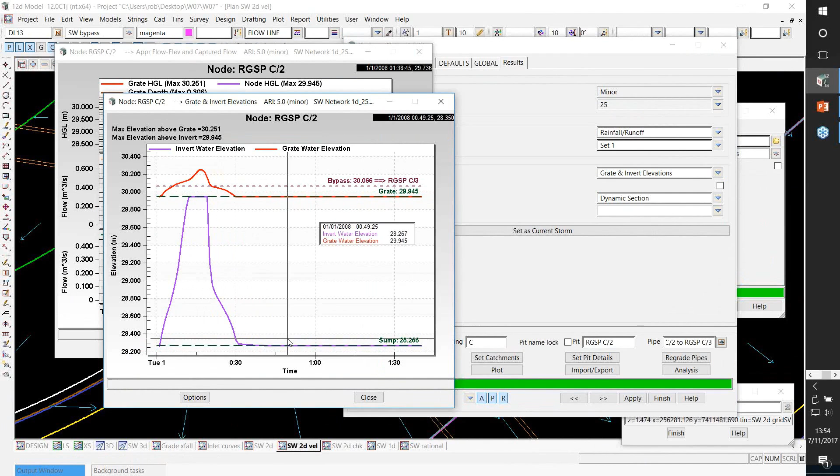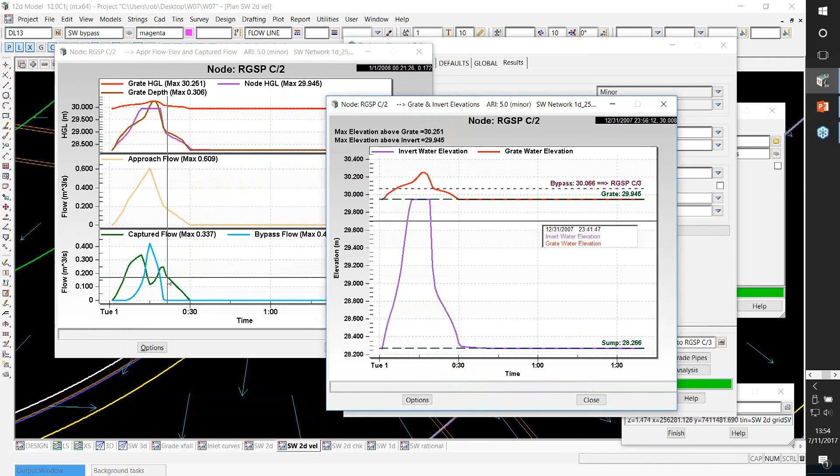So that's going to accelerate the outflow from a pipe, and then vice versa, it's going to decrease the flow in the upstream pipe. So that joining of the subsurface and the surface HGL is a very, very important part of the analysis that 12d does. And of course, you can see the impact of that on the inlet capture.

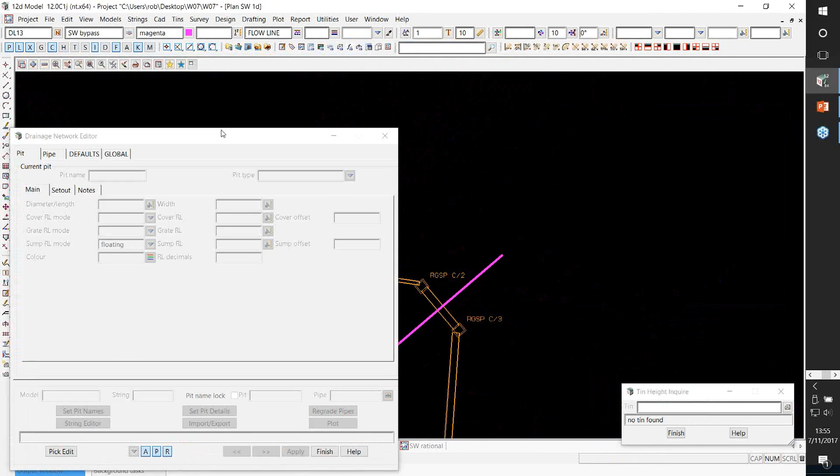So that gives you an idea of the inlet capacity when we run our 2D models. Now let's step across and take a look at a 1D model. So if I go grab the same Drainage Network Editor and I go pick a 1D, now this is a 1D dynamic, okay? So if we go and do exactly the same thing as we would have done, we'll go run that. And this time we've definitely made sure that we have considered bypass turned on. It's going to run a 1D analysis.

Now when we do the 1D analysis, the difference there is that the storage and the volume at this location is determined by the overland flow routes that come in. So those overland flow shapes determine, let's get down back here to the SAG, how much storage is available at the SAG. But essentially the same philosophy.

I'd come back to the results. I could ask for my approach flow and elevations, and I'd get very similar results for the 1D dynamic and the 2D versus the approach flow and captured, as you would expect. They won't be exactly the same because the modeling is slightly different, but they will be close.

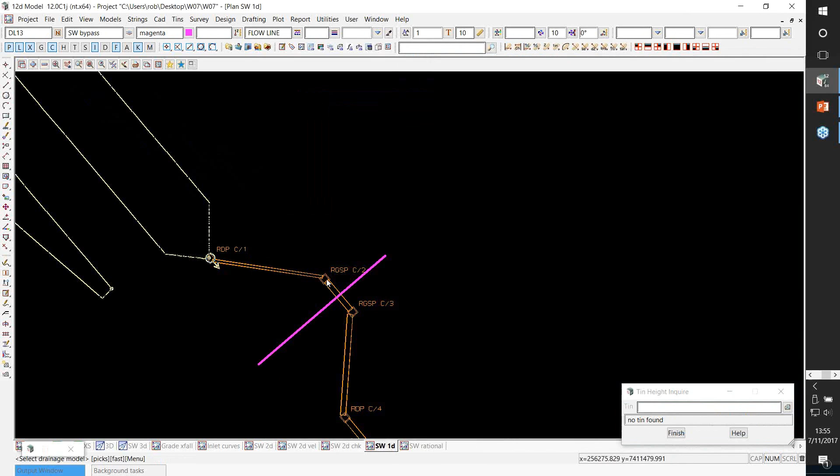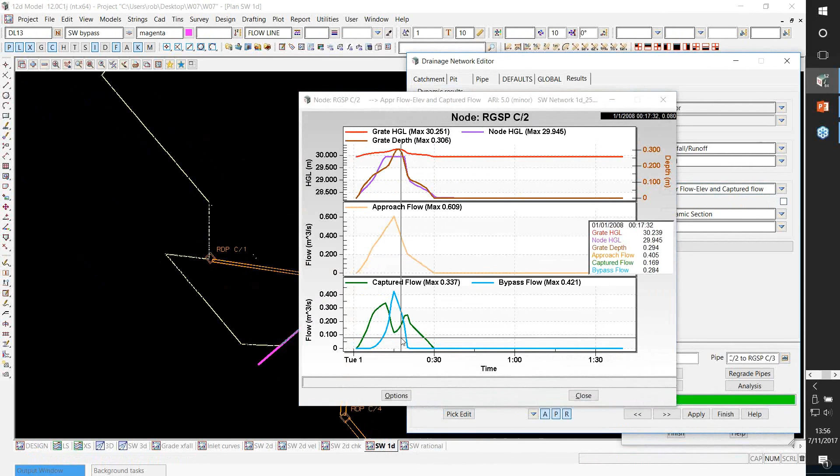And the same thing would be true if we came back and picked the sag locations and we asked to see the depths and the captured flows here. So once again, very similar, but not exactly the same. The last method, of course, we talked about would be the rational method. Now keep in mind that the rational method does not do any hydraulic calculations on the surface.

So when we come back and run the analysis for the rational method, okay, the best place to take a look, of course, we've got our bypass flows on the surfaces here, labels. If we go to our drafting, go to multi-string translate, and make sure we have our text snap on, the group option is a great way just to pick these labels up and move them a little bit easier to read.

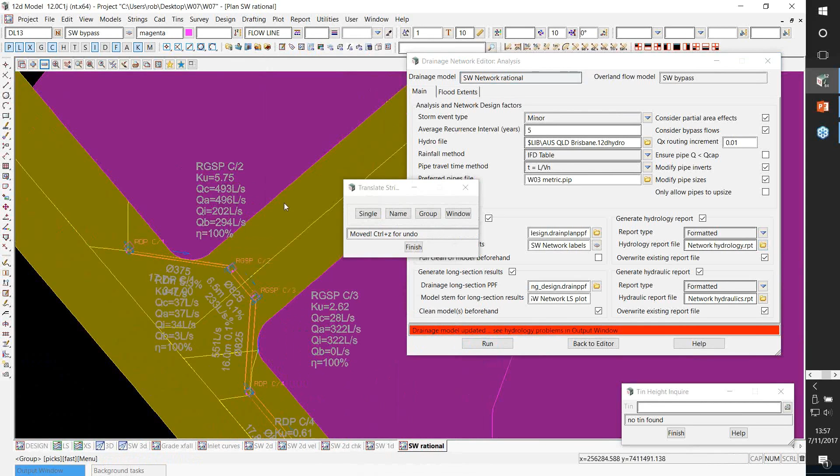So you see we definitely have our approach flows, because we're using the rational method, are about 100 liters per second in this case. Keep in mind there's been no calibration or tried to make them the same. They are lower, so we'd expect to see our inflows and our bypasses slightly less.

So we've covered a great deal inside that webinar. We've talked about all of our inlet capacities for our on-grade, our sag, and our manholes.

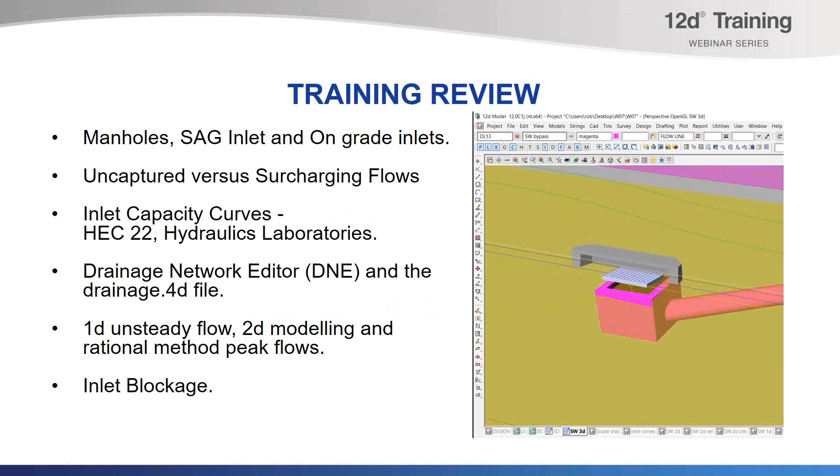So Philip in New South Wales was asking, does 12D consider ponding volumes at SAGs or only the volume in the bypass conduit? Well, yes, we definitely include the volumes at the SAGs whenever we're doing 1D or 2D dynamic analysis, because those are the two that have volumes associated with the hydrographs and have volumes in the surface.

So when we do our 1D, what we do is we look at the approach overland flow shapes, and we look at the volume that's inside those. So at every node, we take 1/2 the length of the approach channel, and then we take a look at the cross-sectional area at the depth, and that determines the volume that's available. So yes is definitely the answer to those ones.

And then you also had that word, or only the volume in the bypass conduit. So yeah, keep in mind that the bypass conduits include the ones that are leaving, but also the ones that are approaching. So it's not only, but we do take care of all the volume that's there.